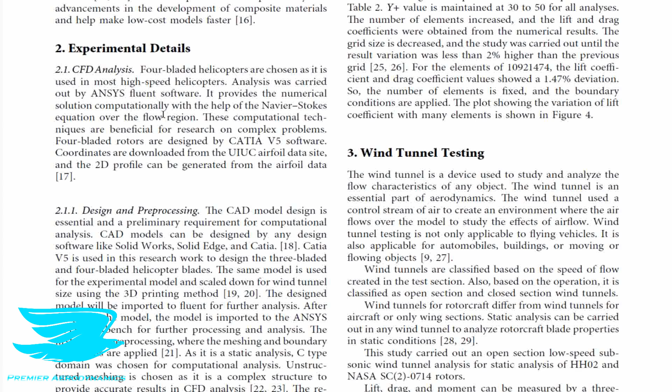So for this particular research, these researchers used CFD and wind tunnel testing mostly for validation purposes, and we'll also see some other interesting results there. For their models, they made the CAD models first and then sent them to the slicer, which is the software that transforms the CAD model into the code that the 3D printer needs to print, as well as adding the various details for the printing temperature, speed, heated bed temperature, cooling, and so on.

So they tested these airfoils at Mach 0.3, 0.4, and 0.5. That is pretty impressive because, again, these are just 3D printed models. And to be spinning around at Mach 0.5 cruising speeds means you have not only the Mach 0.5 speed as you cruise along, but also the spinning speed, the RPM. That means there are a lot of stresses on them. There's a lot of centrifugal force on them.

Interestingly, I have had quite a lot of experience with 3D printing models, particularly for rotating situations. These were different spoked patterns for car rims. These parts also spun around at a very high speed. The cars were traveling at 140 kilometers per hour. They were also fine, mostly. There were a few accidents, but that was to be expected, so the proper precautions were taken beforehand, and no one was hurt or anything like that, so that was completely fine. The wind tunnel wasn't damaged. It was just a couple of these things flew off sometimes and broke. But if you design them well, that doesn't happen. So overall, I was very impressed with how well these 3D printed parts held up.

One thing to note is that the parts that I was testing were printed with an SLA printer, and that is different to FDM, and we'll go through in a second what the differences are. I think it's good to talk about these two different methods because they're the main ways that we print models these days. The first one is FDM, the second one is SLA.

While they are both 3D printers, there is a very big difference between the quality that comes out. Historically and even today, SLA printers are far higher quality than FDM. The surface roughness is uniform, while for the FDM approach, the surface roughness has this periodic waviness, and it is to be expected because of how the layer of plastic is deposited or whatever material you're printing. You can print even stone or wood and even a carbon fiber kind of thing.

But anyway, so the FDM printers work by literally heating up plastic, a thermoplastic, not a thermosetting plastic, and then they squeeze this plastic out through a nozzle and lay it down in the right place. As you complete one layer, you then move the nozzle up to the next z-axis height and do the same thing, and you repeat this process until you have finally finished the part.

FDM stands for fused deposition modeling, which literally means you're depositing a finite amount of plastic at a time and fusing it to the other bits that you already deposited.

Contrasting that with SLA, SLA stands for stereolithography. The way this 3D printer works is that you start off with a liquid, and this liquid is effectively liquid plastic. Technically, it isn't a liquid plastic because a chemical reaction is needed to turn it into a solid plastic, but it's close enough.

So how this works is you have a vat of liquid, and usually underneath it you have a light source, and this light gets concentrated to a certain point in the liquid. The point at which the light is concentrated undergoes a chemical reaction, curing it and turning it into a solid plastic. Once you finish the part, you finish the curing process and rinse it, and then you have the final part.

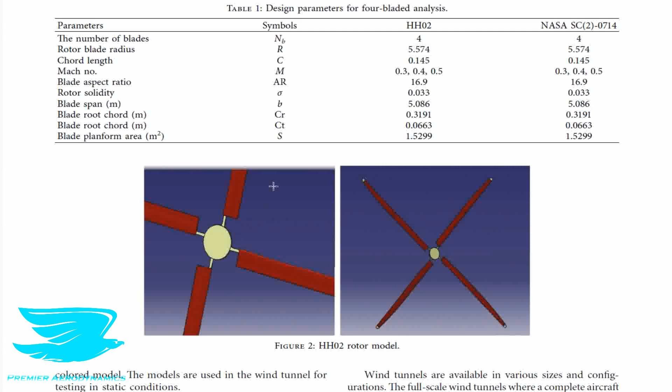For the CFD setup, they use an unstructured mesh, which is good for modeling the finer details, but the downside is the increased number of cells. As we'll see later, they used quite a lot of cells, which means they did their best to get good accuracy, which is good.

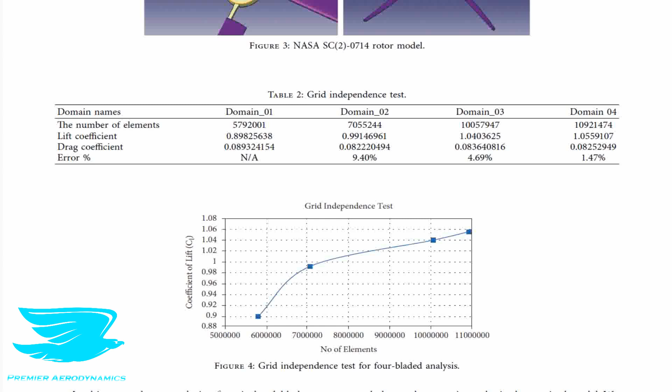They also looked at a bunch of different turbulence models, which I should go up to here. We can see the different turbulence models here. They have the experimental results in blue. They have the realizable K-epsilon, SST K-omega, which is generally my favorite for a plug and play kind of situation - you don't have to think too much about it. If you want to think more about the situation, you can fine tune it with different turbulence models. So the SST K-omega is here, the K-omega, and then the RNG K-epsilon approach.

Because they're using turbulence models and they don't talk about time steps, we can pretty much conclude they used RANS here. In figure 1, we can see how the results on the lift for these blades were affected by these different turbulence models. This is great because often we just talk about how turbulence models affect the flow, etc., but now we have, for the exact same application, different results.

So you can see that the experimental line is right here. This is the blue line.

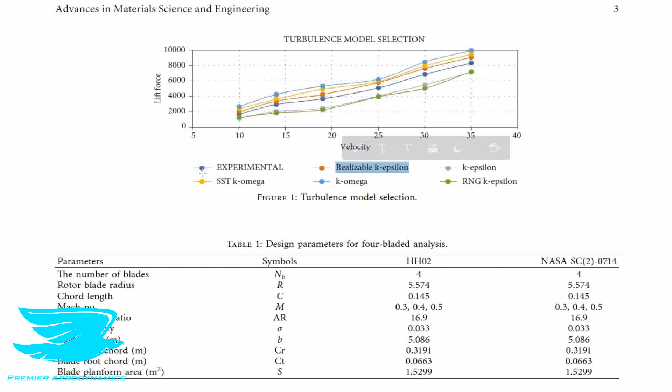So they're going forward with the realizable K-epsilon turbulence model here, which they found is best in this situation. In terms of the grid independence test, they looked at 4 different mesh resolutions. Let's go down here to see these mesh resolutions, shown in table 2. The coarsest mesh had 5.8 million cells, while the finest mesh had 10.9 million cells. The other 2 meshes had values between 7 million and 10 million.

So they use the lift coefficient as the value to measure the grid convergence by. In figure 4 here, they have the lift coefficient on the y-axis and the number of cells on the x-axis. Their study definitely shows that their mesh was approaching independence, but there was still a small change of 1.5% in the lift coefficient between the finest and second finest meshes, as we can see here, the error between the lift.

So they concluded that this was good enough for convergence, and I believe that they used the finest mesh of 10.9 million cells, but they don't say explicitly from what I can read. One thing to note is that they used a y plus value between 30 and 50 for all of the grids. As they are using the realizable K-epsilon turbulence model, these values are acceptable.

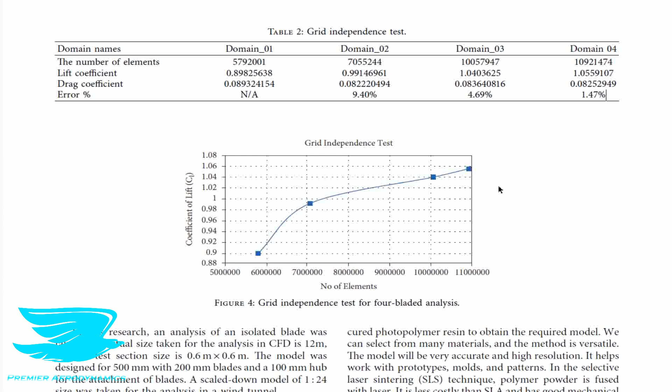So one thing that is important, I'm going to discuss what the y plus value is first, then talk about how the turbulence models tie into that. The y plus value is effectively a way of telling us how well resolved the boundary layer is. What that means is that the closer to 1 the y plus is, the more important parts of the boundary layer are simulated. The further away from 1 it is, the less accurate it is effectively.

On the other hand, for the K-omega family, you need to have a y plus of like 5 or lower, which means you have to have a much finer mesh, particularly in the boundary layer, to get good results. And if you go from 1 to 5 to 10 to 50, you're going to see a major difference in the flow physics and then the lift and drag forces.

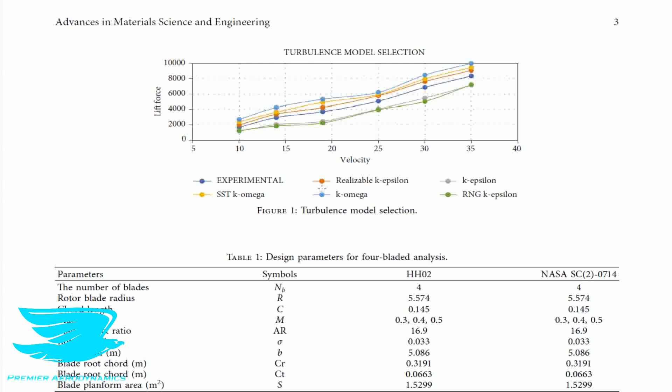So this is probably one reason why the realizable K-epsilon performed better than everything else, because in this particular case, they had a fairly high y plus of like 30 to 50, and the K-omegas aren't going to be able to contend with that because they need a y plus much lower than that. So that's one reason potentially why the realizable K-epsilon came out better here.

So let's move on to their wind tunnel testing, because this is where they put the 3D printed parts into the wind tunnels. One thing that is quite important to note is that they say in relation to the blades, let me find it here, just here. They say the actual size taken for the analysis in CFD is 12 meters for the blades, but the test section size is 0.6 meters by 0.6 meters.

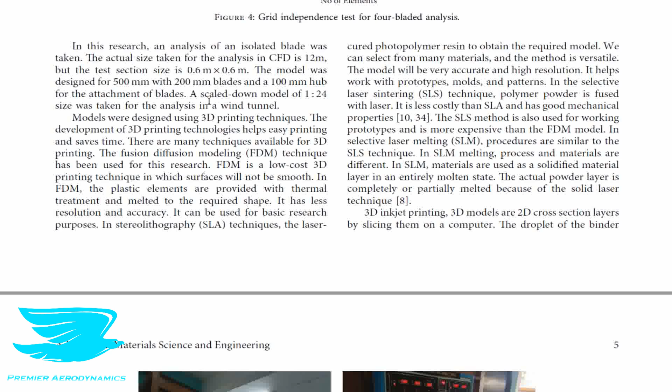The model was designed for 500 millimeters, with 200 millimeter blades and 100 millimeter hubs. So what this means is that for their CFD, the blades were 12 meters long, but for their experiments it was only 200 millimeters long, because the experimental setup's wind tunnel had a much smaller cross-section than a 12-meter cross-section. That would be one of the biggest wind tunnels in the world if they had that.

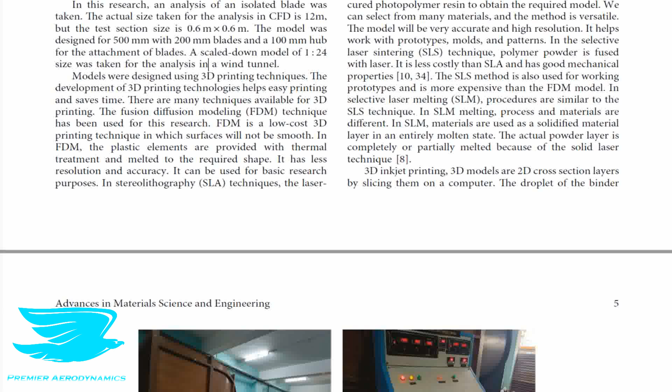So this presents us with a problem. The key thing when doing CFD and using wind tunnel data to validate your CFD is to use the exact same setup in your CFD and your wind tunnel. If you don't do that, then you're not really comparing the same thing. That also means you need identical geometry. So if your test section is 600 by 600, your CFD domain has to be 600 by 600. Here, they don't do that.

So there is obviously a large difference between the CFD, where the blades were 12 meters long, at least that's what I can tell here, and the wind tunnel, where the blades were only 200 millimeters long. That introduces a lot of potential differences. The funny thing is there may not be anything wrong with their CFD, but because the CFD setup was different to their wind tunnel, you can't expect the data to match up 100%. So effectively, the CFD is right, the wind tunnel data is right, but because they're under different conditions, they're not going to match up, and that's going to cause a potential problem in the validation process.

Another thing most aerodynamicists don't do is take into account the density of air when doing experiments. This is important because in experiments we're usually only looking for a few percent of change. We might test one airfoil versus another, or one type of car versus another, and get like a 3% change in drag or lift. That's not a lot, and the problem is the density of air changes by that much throughout the day, and even more between days, weeks, months, and seasons. Experiments usually take place over more than one day, so when you get your data from your wind tunnel, there'll often be an inaccuracy of 5 or 10% from the change in air density, which you don't even know about.

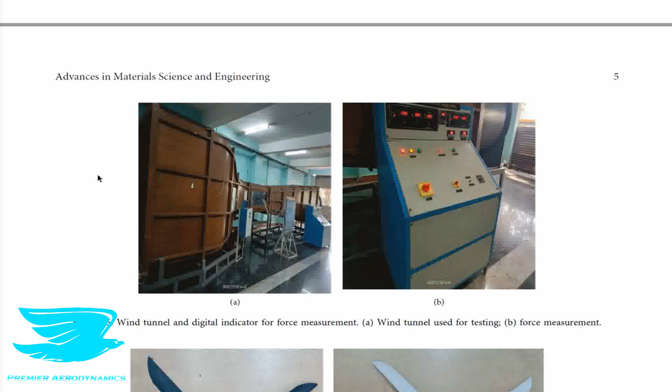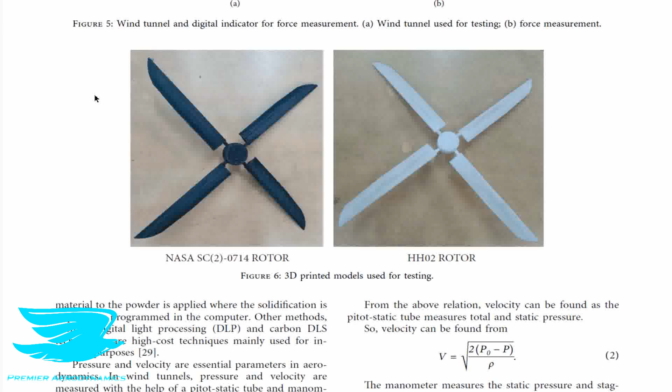So anyway, in figure 6, you can see the 3D printed blades. The 3D printing process is much more noticeable for the black blades than the white blades. So for the black blades, you can see quite clearly the different layers. There's like different white parts. Let me zoom in actually. Let's see if we can see it a bit better. So you can see how it comes out in these strange white sections. Those are the different layers. Whereas with the white part, you can't really see that too much.

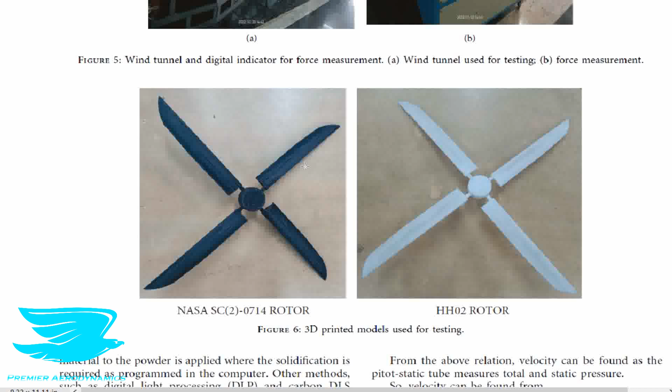So from what I can tell, they didn't sand the blade smooth, and speaking from experience, that is something you can definitely do with 3D printing, but it takes a lot of time and a lot of care. So you need to be careful around the trailing edges, and if you do the sanding, you can get the surface roughness down to like 5 microns, which is very smooth and comparable to other machining techniques.

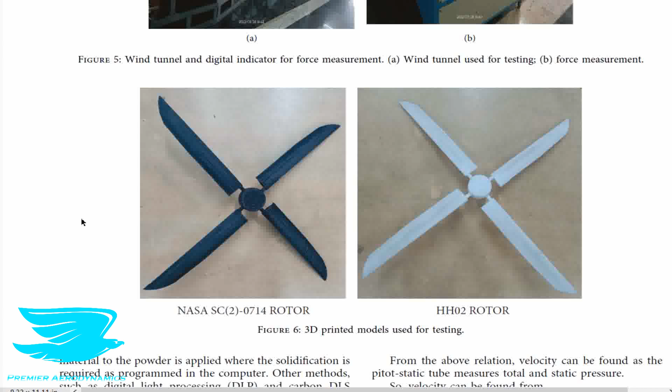So let's move on to the results. So these researchers looked at 2 different types of blades, one called the HH02, and then one called the NASA SC2-0714. The difference is that the HH02 is what's called a reflex airfoil, and that is where the airfoil trailing edge pops up at the back. The benefit of this type of airfoil is that the moment about the aerodynamic center can be 0. So what that means is that it is inherently stable.

On the other hand, the NASA SC2-0714 is a supercritical airfoil, and a supercritical airfoil is one where the critical Mach number is as high as possible. So what this means is that the airfoil can travel closer to the speed of sound without sonic flow occurring over it, hence it doesn't experience such a great wave drag. In other words, it produces less drag near the speed of sound.

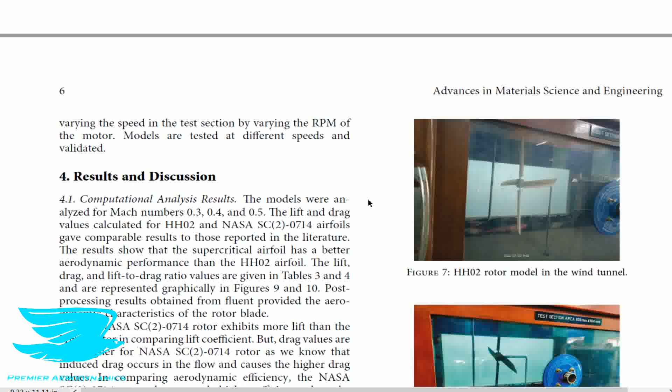So the results of the CFD at Mach 0.3, 0.4, and 0.5 are shown in tables 3 and 4 for the HH02 and the NASA SC2-0714 respectively. So the lift to drag ratio is here and here. It is clear from these ratios that the NASA airfoil is much better. It hovers around the 13 mark, while the HH02 is around the 7 mark.

Interestingly, as the Mach number increases from 0.3 to 0.5, both the HH02 and the NASA airfoils experience improved lift to drag ratios. And this was mostly because of the drop in the drag coefficient. So you can see for the HH02, for example, when the Mach number went from 0.3 to 0.5, the drag coefficient dropped from 0.059 to 0.054. And likewise for the NASA airfoil, it dropped considerably as well. So that bump up in the lift to drag ratio came about because of the drop in the drag coefficient and a little bit of an increase in the lift coefficient, but not nearly as much as the drop in the drag coefficient.

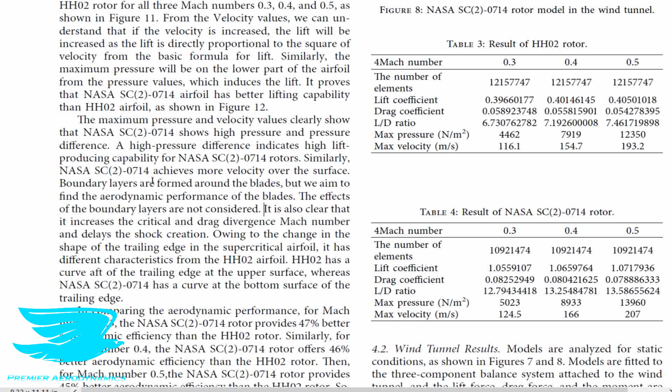So now for the experiments. From what I can tell, the blades survived the spinning, which I'm a little amazed at because of how great the centrifugal forces would be at Mach 0.5, and the fact that this is an FDM 3D print, which isn't that strong. The layers are not really fused together that well, but they survived, so that's pretty impressive.

So Table 5 and Table 6 show the results for the different RPMs of the HH02 and NASA airfoils respectively. The RPMs went from 500 RPM to 1000. And here, as in the CFD, the lift to drag ratios for the NASA airfoil were always about 30 to 50% better than the HH02 airfoil. So we can see here the aerodynamic efficiency, L/D, ranged from 17 to 21, whereas for the HH02, it only ranged from 11 to about 15.5.

For both airfoils, as the RPM increased from a minimum of 500 to 1000, the lift to drag ratios dramatically increased. So for the HH02, the lift to drag ratio increased by like 50% over this RPM range, while for the NASA airfoil it increased by 25%. It is kind of difficult to tell whether this improvement came from the lift or the drag, but if we look at how the lift and drag were affected across the RPM range, we will see for the HH02 that the lift increased by about 325% when you increase the RPM from 500 to 1000. So that's 425%, not 325%.

And the drag only increased by about 275%. So the lift increased by a factor of 4, whereas the drag increased by a factor of 2. So we can tell that because the lift increased by so much compared to the drag, we can conclude that the lift to drag ratio increased mainly because of the lift, and not so much because of the drag.

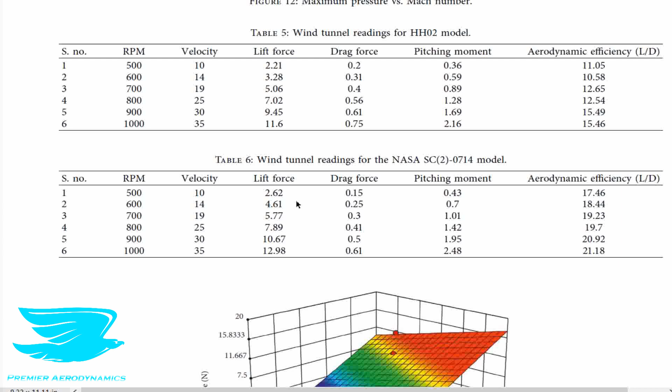And a similar conclusion can be drawn for the NASA airfoil, where the lift increased by about 400%, while the drag increased by about 300%. So we can say that the increase in the lift to drag ratio was mainly because the lift improved at a greater rate compared to the drag over this RPM range.

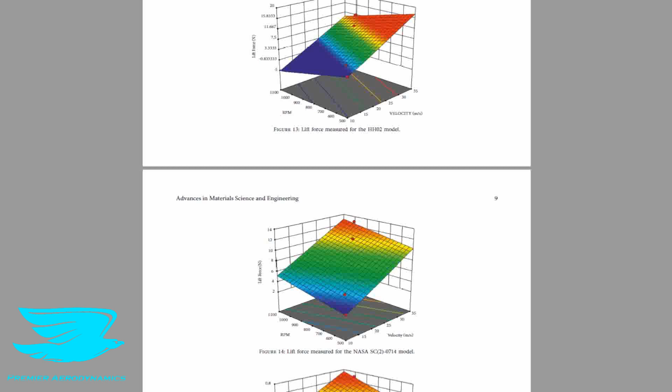So moving on to figures 13 and 14, let me zoom out a little bit here so we can see. So figures 13 and 14, we see how the lift changed for the HH02 and NASA airfoils, respectively, when the RPM and velocities changed. So we have a nice 3D surface plot here for each one. The x-axis has the RPM, the y-axis has the velocity, and the z-axis has the lift force. So interestingly, the trends are not the same.

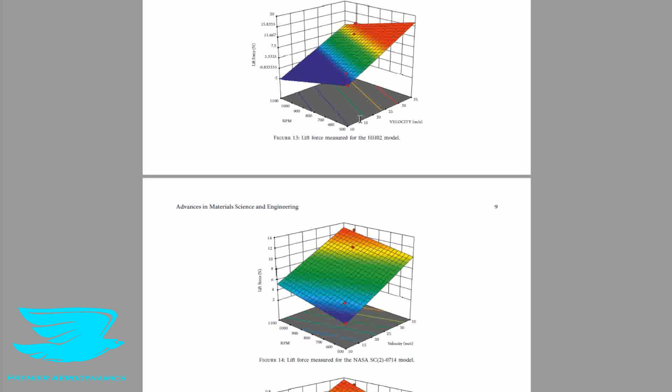So for the HH02, which is this top one here, increasing the RPM across this x-axis here, while holding the velocity constant, actually reduced the lift produced. Whilst for the NASA airfoil, the opposite is true. If you hold the RPM constant while increasing the velocity, the lift increased. So it's the exact opposite trend for these different types of blades.

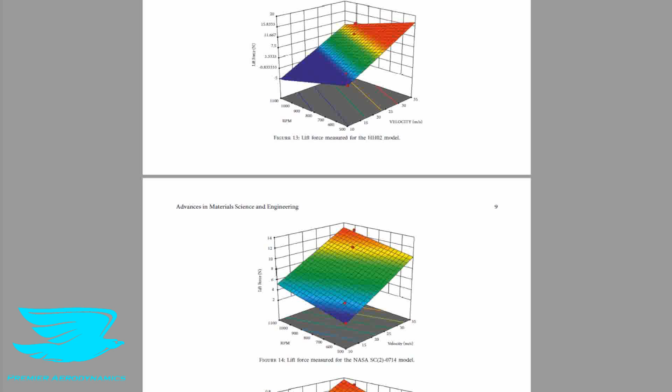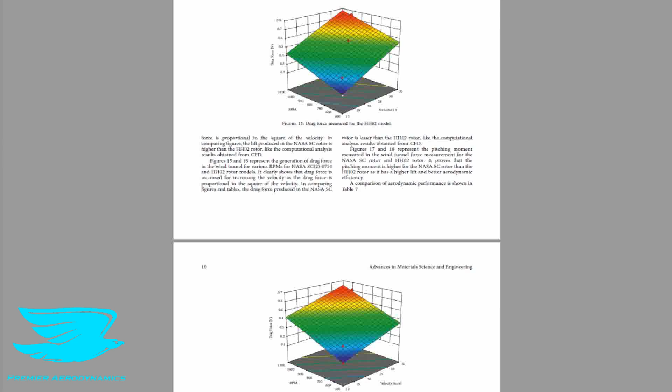So while the lift had the opposite trends for these two different blades, the drag follows the same trend for both of these blades, which is if you keep the velocity constant and you increase the RPM, or you keep the RPM constant and increase the velocity, the drag increases. So that is the end of this paper. I really liked it. I really appreciated how the 3D printed models held up to the forces, and it was pretty cool seeing the different results here.